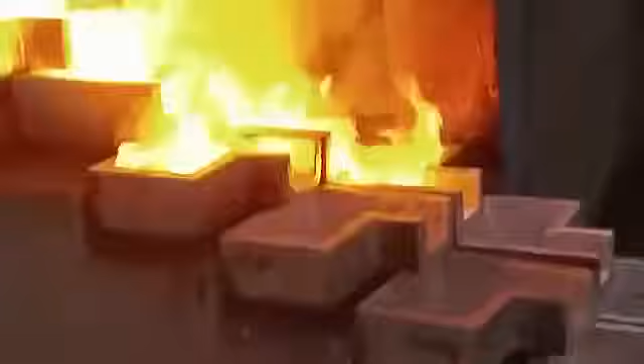5,700 of the world's toughest workers face a job site with temperatures hotter than 150 degrees. My God, burning hot water. Where makeshift supports hold back millions of tons of rock. I'm gonna lose it. All for one of the most valuable metals on the planet. Solid gold. That's not even a joke. That's actually solid gold.

I'm in Johannesburg, South Africa. The locals call this place Egoli, which means city of gold. And quite literally, the soil under where I'm standing is the richest in the world. Located in the northeastern highlands of South Africa, Johannesburg sits above half the world's gold deposit.

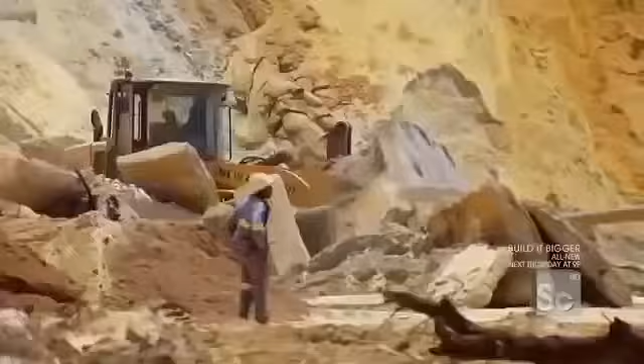When gold was discovered in Johannesburg in the late 1800s, people flocked from all over the world to mine this ore. It was so plentiful that you could actually see the gold on the surface. Over time, mines opened from the east side to the west side of the city, mining deeper and deeper into the earth. Today, there are 70 gold mines in South Africa, employing over 500,000 people.

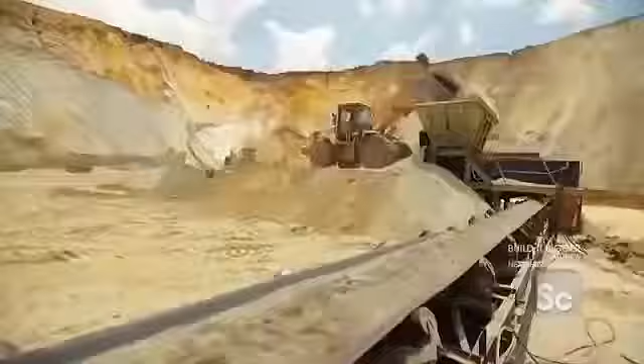The problem is, after over a century of mining, this precious resource is beginning to run out. In the last 10 years, the country's gold production has dropped 45%, while the price of gold has skyrocketed. Now, to re-establish the nation's most important industry, one South African mine is attempting to dig deeper than ever before.

An hour outside of Johannesburg, the Mponeng mine is already the deepest mine on the planet, a subterranean gold factory 2.5 miles down. With more tunnels than the New York City subway and the world's longest elevators. However, most of the original gold deposit has already been mined, and the rest will be gone in just 8 years.

So to keep the mine going, geologists have been drilling and testing in all directions, searching for more gold. They finally found it, a new deposit called a reef, located over 3 miles from the surface, holding over 140 tons of gold, worth over $6 billion.

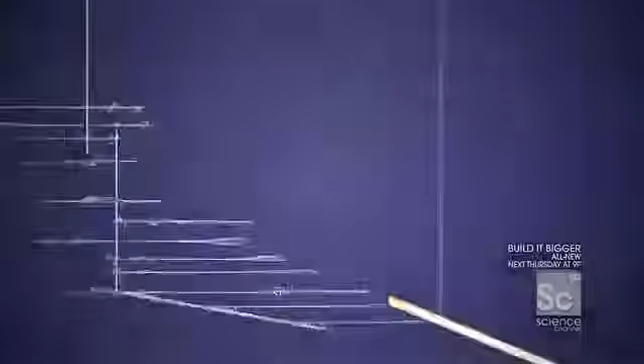So if you didn't go deeper, within about 7 or 8 years, you would have simply mined all the gold that you can get at that depth. That's right. So this new project gives you the potential opportunity to extend the life of the mine by how many years? With the current project, the life of mine will be extended to 2029. 2029? That's correct. So instead of 7 or 8 years, we're talking about 20 years.

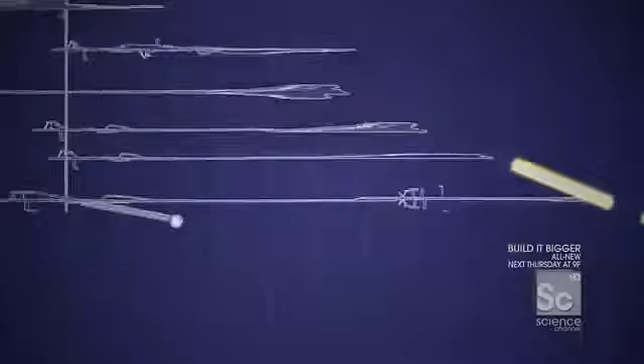That's right, yes. While the team mines out the final gold deposits in the existing mine, they've also added a new deepening team. Their job? Tunnel 7,000 feet deeper to reach the new reef, one blast at a time. The commute to a job a third of the way into the Earth's crust takes an hour and a half.

The trip starts in the longest elevator in the world, a 50-ton beast that carries 120 miners at a time. You know, given where we're going, Gordon, you guys didn't do much to kind of soften the blow and make this thing look nice. This is it. This is mining. This is reality. You ready? Okay. Right, let's go. Bye, donkey, Billy. All right. Here we go.

The elevator travels at 40 miles an hour. It pretty much feels like you're free falling down into the earth. Now 1,000 feet from the surface, 2,000 feet. I'm now deeper than the Grand Canyon. I'm now almost at 8,000 feet. For every 100 feet we drop, the rock gets 1 degree hotter.

Every couple hundred feet, it gets a little bit hotter, a little bit more pressure, and you can feel that inside your head. We're now approaching the bottom. This will be 12,600 feet. Keep in mind, this is the deepest point that any mine has ever worked at in the history of mining. From the bottom of the elevator, it's another 1.5 miles to the face of the tunneling project.

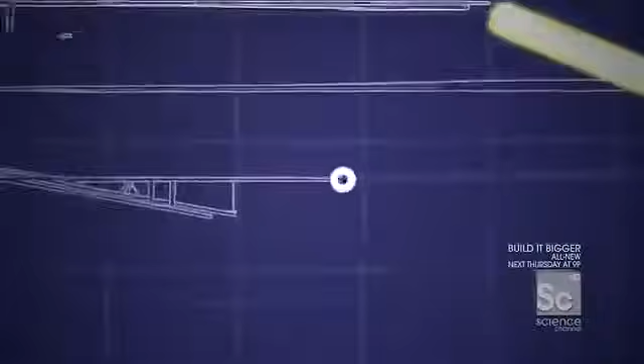The closer you get to the active face of where the rock is, the hotter it gets. So as I step down, every single step, I can feel the temperature getting slightly higher and slightly higher. And right there, that is the very deepest point in this mine. It'll take 600 blasts to reach the new gold reef. They're prepping for blast number 540.

And blasting in the deepest spot on Earth is unlike any other kind of blasting. Faults scattered throughout the rock make earthquakes and rock falls a constant danger. Punishing geothermal heat also makes the working face a scalding 150 degrees Fahrenheit. Oh my God. That's burning hot water. The water that's being heated by this exposed quartzite is literally brought to the point of burning my hand just from the energy from the Earth. Energy from the Earth, and then, of course, the drilling.

Okay, so Gordon, this exposed wall right here, this is the wall that we need to get out of our way. Yes? There's gold back there. Yes? So this wall has to continue to push deeper into the Earth to enable us to go up and straight out to get that gold.

Correct. The rock is riddled with faults, which means the energy from the blast needs to be carefully controlled or risk creating an earthquake. They use a diamond-shaped blasting pattern that concentrates the first pulse of energy into the center, opening up a cavity for a second and third round of smaller charges to safely break up the edges of the face.

Okay, now why do that? Why not just have an even amount everywhere? Well, you want the most energy in the center, because this is the hardest place to break the rock in. As you move outside, you want less damage. If you damage the rock on the outside, you have to put more support in it. You want to keep the ground as stable and as fracture-free as possible on the outside.

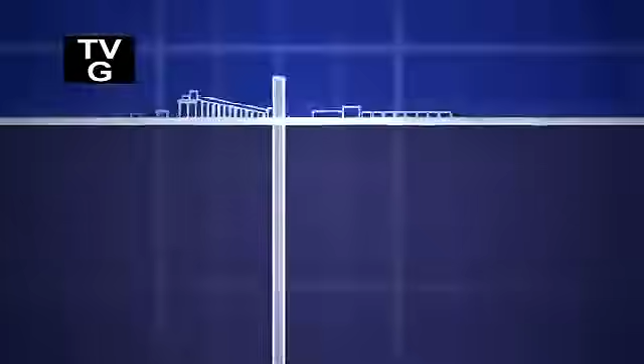In South Africa, the world's deepest mine is blasting 40 feet deeper each day, tunneling towards a reef of new gold worth $6 billion. Almost 3 miles down, each blast risks rockfalls and earthquakes. And with the latest blast detonated just moments ago, it is essential to quickly support the new tunnel face.

Once the blast is complete, the now newly exposed rock is susceptible to the nearly 13,000 feet of pressure pushing down in the tunnel. So to make sure this is safe before any more mining can happen, these guys have to re-support the roof and keep this ceiling up above us. So once you remove the rock, all the pressure from the 12,000 plus feet of Earth is pushing down on our heads right now. Yeah, so the tunnel wants to collapse. That's the natural desire of the Earth right now. That's a natural desire. That's what it tends to do, is to close up.

So essentially, like Atlas, it's your job to sort of push back on this rock and support this open tunnel. Yes, that's basically our job, what we're doing.

You look like Atlas. You're a big man. You can hold back the rock.

The temperature at the face is 150 degrees Fahrenheit, and ammonia fumes from the blast fill the air. Regardless, the team has got to begin work. They do it with a grid of 33 steel rods called split sets. The split sets work like giant screws, pulling the layers of rock together. They're driven 4 feet into the rock face, each holding back 17 tons of rock, 500,000 pounds in all.

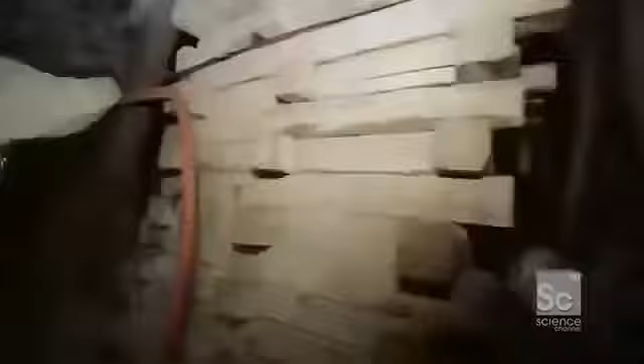The biggest danger when digging 12,000 feet down is triggering a seismic event. There are dozens a day down here, and nowhere to go if one hits. To minimize the disturbance to the rock, the tunnels are kept as small as possible. Now, as I walk up this precarious angle, just keep in mind, look to either side. It's these wood rock packs that are just literally holding this rock up, right? This rock, as you can see, has had its support taken out. They've removed the rock. So the inclination of this geology is to simply come right down on top of us. This support is needed to withstand the massive seismic shifts caused by the blasting.

So, Clive, on a given day like today, how many seismic events happen, for example? We could have hundreds of seismic events, but most of them happen during the blasting time. You mean when the blast just went off like 4 seconds ago? No, that's not the development blast, but the face blasting. Okay, so the blasting is going to happen here this evening. At the face, yeah. So we're on a sequential, centralized blasting method. Everything's cool.

Okay, Clive, my God, that was definitely it. I definitely thought that was it. I definitely was like, well, no, we're fine. Can I just continue? Oh yeah, Clive, just continue with what you're saying. Don't let the neighboring explosion in the rock impede your progress. What's happening inside of you, man?

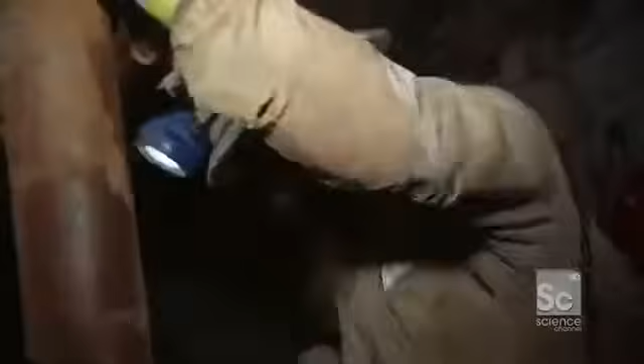So as you can see, what we're doing is essentially wedging this thing in, pushing it down solidly into the ground, and then pushing it tight up to the rock face, and this becomes a strut or a column that holds back this rock. So look at that, just like a jack, you jack up a car to change a tire, same principle. He's jacking it up, it's pressing up against the rock, and now this thing is one solid column, one of many, that's keeping this roof safely above my head.

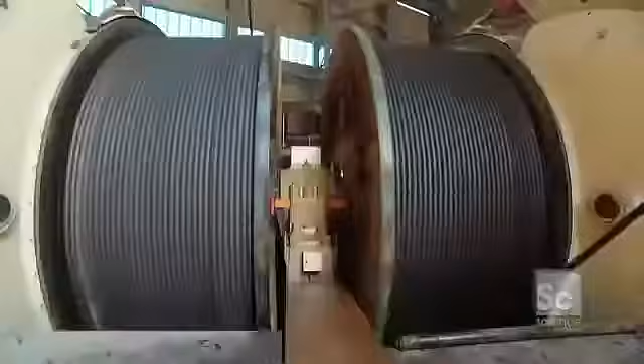Coming up, servicing the world's deepest elevator means slicing one of the longest and heaviest steel cables ever built. This is like an extraordinarily bad idea.

For the miners that commute 2.5 miles underground, 3 shifts a day, there's simply one way in and one way out. The elevator shaft. The elevators are the very lifeblood of this job site. They are what enable them to get 3,500 workers underground and at the same time pull above ground literally hundreds of thousands of pounds of rock. So given the extraordinary requirements on this site, these are no ordinary elevators.

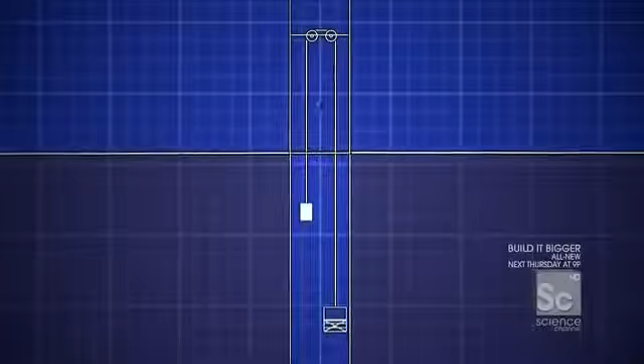A typical elevator uses a weight to counterbalance the load. However, a weight for an elevator this heavy would be more than 60 tons. Instead, the mine offsets the cab with a second elevator. So when one elevator goes down, its weight pulls the other one up.

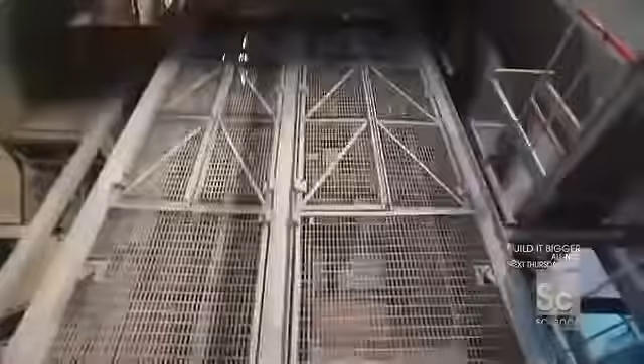Instead of having to actually pull the elevator up and actually lift its own load, you counterbalance its weight with another hoist. Yeah, with the skip that is actually descending. That's a counterbalancing effect that we have in order to improve the efficiency of your winding cycle.

With 300 lifts a day, the mine's elevators travel the distance to the moon every 9 months. You have the weight of the rock, you have the weight of the hoist, you have the weight of the cable, and all of this is happening constantly on both sides, basically 24 hours a day. Yes, 24 hours a day, sometimes 7 days a week. Including the 20 tons of its own weight, the total load on this rope can be more than 70 tons.

Last year, a rope at a nearby mine snapped, dropping a cab, killing 8 miners. So to prevent a similar failure, the team is performing a stress test on the elevator rope. What are we doing today? We're going to cut the front end of the rope and then send it away to the laboratory to be tested in order to ensure that the integrity of the rope is still all right.

I mean, it's hard to overstate, but this is for the safety of people who are in the elevators, for the ability for you guys to mine. I mean, this is the lifeline of the project right here, right? That is right. It's a risky cut.

Over time, thousands of trips up and down have twisted the rope, tightening it and building up enormous amounts of torsional energy. If I have a plastic shopping bag and I sort of spin that shopping bag, it'll spin and spin and spin, and all of that torsional energy is bound up in that rope right there. And if I let go, it'll unspin very quickly. Yes. And today, as we cut this rope, all of that torsional energy is built up inside the rope. Yes. So we have to make sure to take out the spin before we cut the rope.

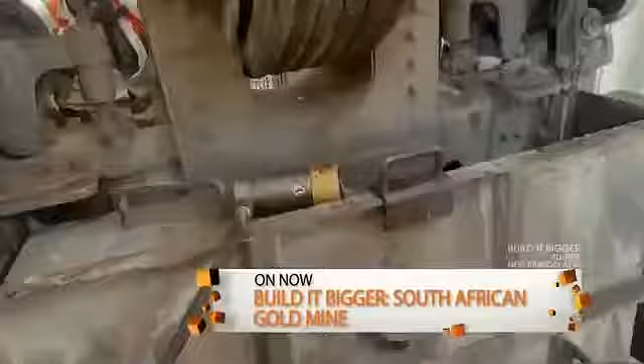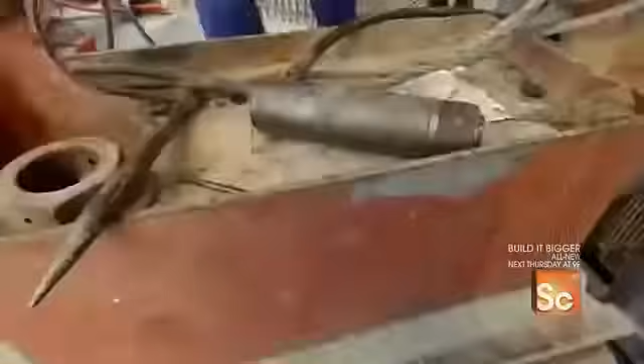Yes, that's correct. With the elevators offline, no rock will be hoisted to the surface. The team has only 2 hours to get the rope section cut and the elevator back in service. The first step is to secure the elevator with a cross-beam support. So it's this piece of steel right here that locks the conveyance into place so it doesn't fall when the cable comes out. Then, while standing on top of the elevator, they unhook the rope.

And Chris, I have to put a harness on because what happens if I fall down there? How far is that? Well, we will find you 8,400 feet below. 8,400 feet down. In many pieces. In many pieces. Thanks, Chris, a man of details.

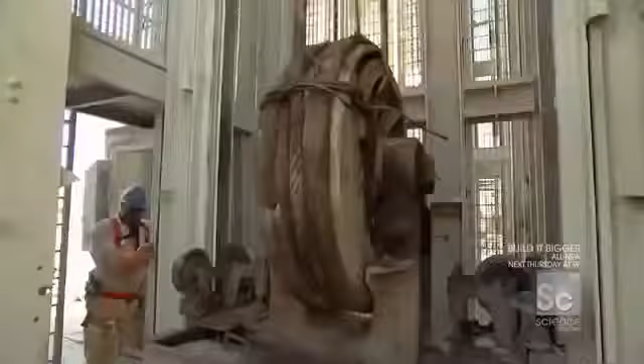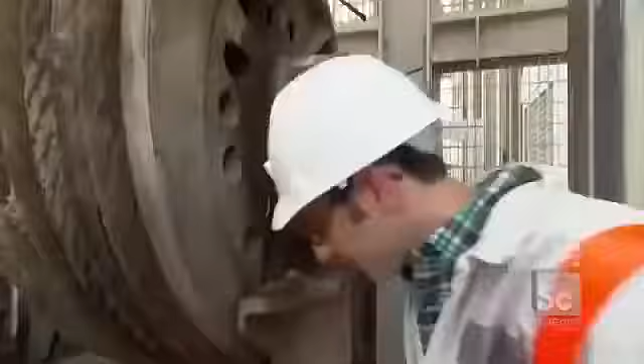The rope is held in place by a single 100-pound steel pin. It's so tightly wedged in, they have to use a hydraulic jack to get it out. That pin right there is the very last piece of steel that's holding this entire compensator to the elevator. So basically, we're going to use the jack to just smack this pin out and disconnect the hoist from all the cable. All right, Marnie, let's do it.

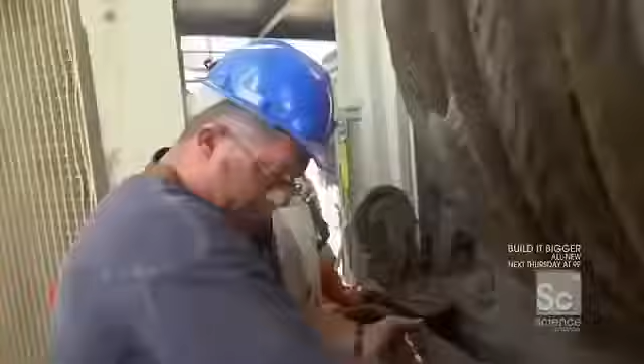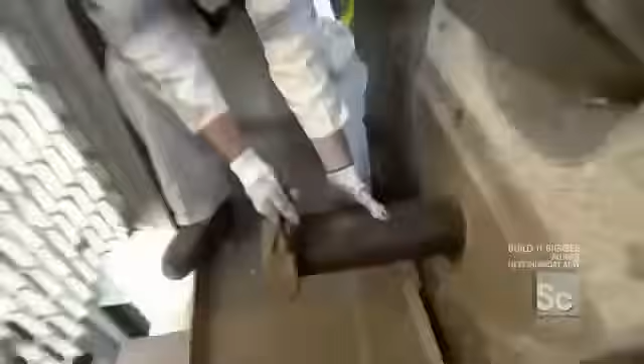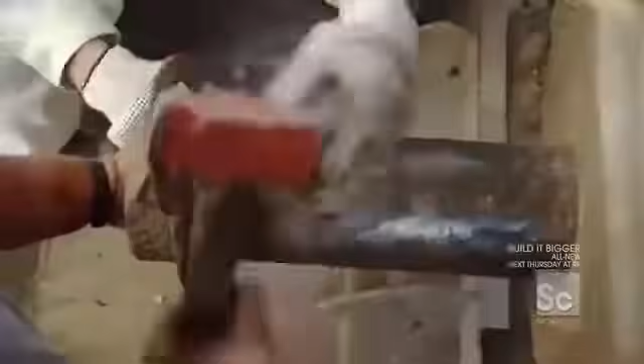To be sure the pin doesn't damage the top of the cab, it's coaxed the final 4 inches by hand. So, Marnie, the pin is like 99% of the way out, right? Yes. Okay, so slowly ease the pin out. Yeah, we just pull the pin out. All right. You ready? You want to smack? I'll smack. You hold. Is it coming? It's coming.

Ready? Okay, hold on. Okay. You got? You okay? Got it, put him down there. Okay. I feel like we just kind of delivered a baby here.

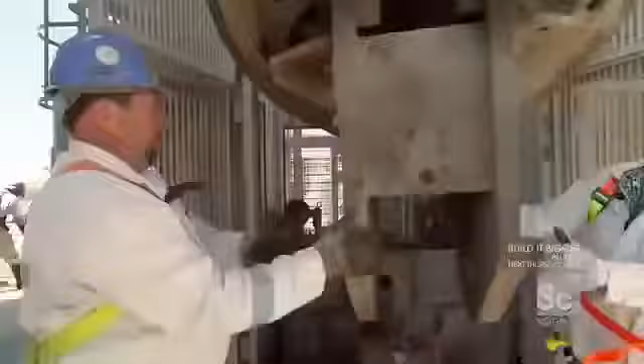All right, so let's do it. The pin is now out. Let's separate the compensator from the hoist and get these cables over there so we can cut them. To keep the tightly wound rope from violently spinning out, first they have to clamp it down. You open this up, and then we're going to take the rope, lower it into this hole, so that when we finally cut the rope, all that torsional energy, all of that spin force will get released and controlled with this thing right here.

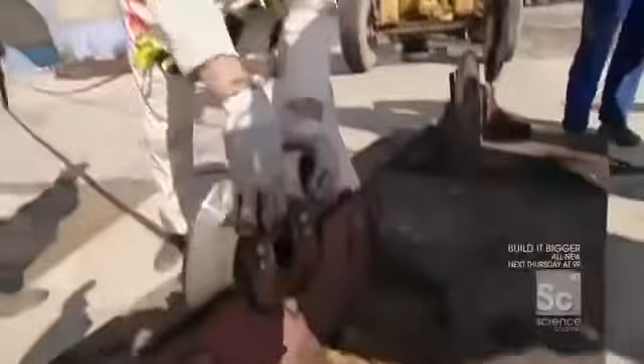The rope is locked in with 4 bolts. This is essentially like a brake pad, like a caliper on the brake. When it's cut, it wants to spin like crazy, but you can apply pressure and slow that spin down.

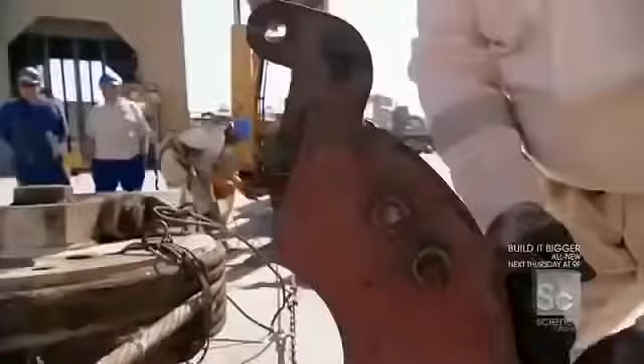With the cable locked into place, the team can now remove a 25-foot section for testing. Because it's strong enough to lift 3 fully loaded semi-trailers, the only way to slice through it is with an acetylene torch. You're actually cutting it with a torch, melting it, and you have molten steel slag. There's so much embedded torsional force that when you finally cut the cord, it can actually spin out and spray you with that stuff.

There you go, thank you sir. Great, you can open it there. Do I need your glasses? I think that would be better, I think they better too. And also, let's be honest, I'm gonna look like a badass. I'll trade you those, I have an astigmatism.

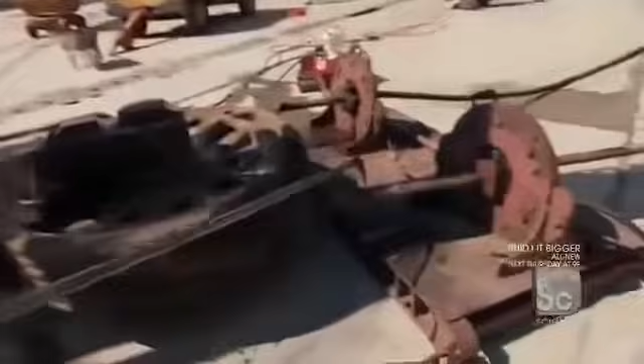Now it's fixed. Hey Nick, I'm gonna hit it right here, right buddy? You like that? You happy with that? Can you see with those glasses on? It's clear? Yes, you look pretty now. I look pretty? You look handsome and clever. I don't know why, Nick, you look so much smarter all of a sudden.

All right, I'm gonna crack open the acetylene first. Open, gets a little bit of acetylene going. And fire.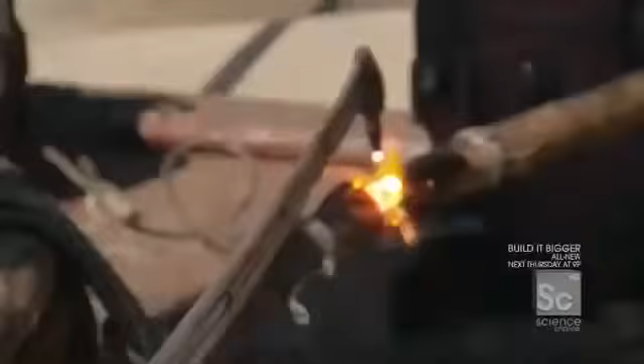This is like an extraordinarily bad idea. The torch burns at 3,000 degrees, which is 1/3 the temperature of the sun's surface.

There it is, she's opening up. It's gonna kill me, it's gonna kill everyone. Extreme heat is needed to melt through the dozens of interwoven steel wires inside the rope.

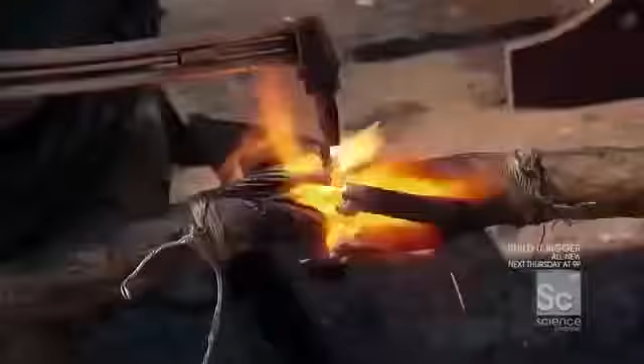Oh, there it is, there it is. Oh! Oh!

All right, so I get back my glasses. Nick, the Boilermaker, gets back his torch.

And we're set. Now that it's separated, we're going to release the tension and let all of that force out of the cable. Marnie, you ready?

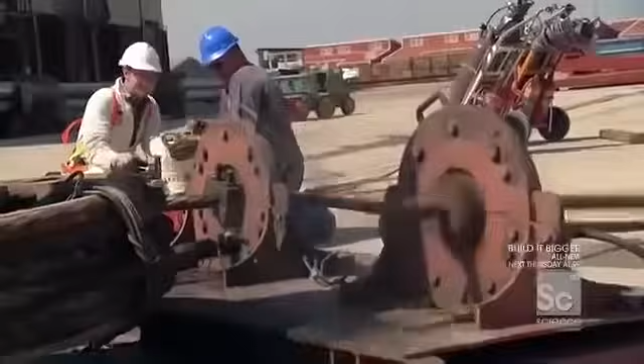Release it out, start spinning, immediately pull it back, lock it up. Here we go, everyone stand back. Let's release the tension. Dear God. Ready? That's it, again. It's finished now. Well done. Stressful, man.

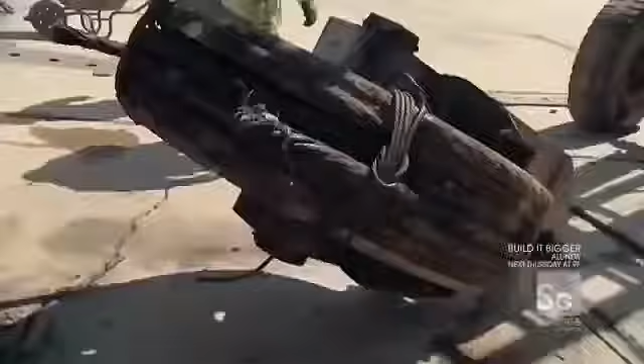Okay, with the piece now cut off, this can go to testing. And now, as you can see over here, we have to re-spool this up, connect both wires, and ultimately within about 1 hour's time, get this cable back in the shaft and the mine working again.

Coming up, I strike gold. This is it, this is it. This is the gold, in some of the oldest rock on Earth.

But first, what skyscraper has the world's longest elevator? The answer after the break.

Your trivia answer: Dubai's Burj Khalifa has the longest elevator at 2,000 feet, just a quarter of the size of Mponeng's elevator.

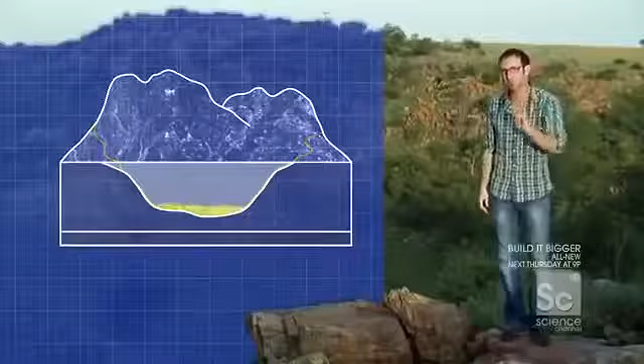South Africa has more gold deposits than anywhere on the planet. But the question is, how did the gold get here? Well, if you go back billions of years ago, this entire region was one enormous lake. Gold deposits were put into this lake from surrounding waters. Then, about 200 million years ago, a series of volcanic events buried this lake, thereby entombing the gold. And that reserve right there is the very stuff we're after today.

Geologists know that the gold is 2.5 miles down. The hard part is getting it out. After 2 miles of tunnels, it's a 100-yard climb up a 22-degree angle to find the mining face of the gold reef.

Okay, this is it, this is it. This is the gold, this is the gold. This is the ore body we're going to mine. This tiny, small 3-foot swath is why I'm now at almost 13,000 feet under the ground. 100% right, and sort of packed inside of here in tiny amounts throughout.

It's gold. The gold is in dark carbon particles scattered throughout the rock, making the reef grayish, not yellow in color. What's so incredible is the gold is so tiny that I can't see it right here. Yeah, so little, specks of it, like particles of sand inside of this.

The fastest and safest way to loosen this ore is to drill and blast. Are we ready to rock and roll? Yeah, ready to drill. Where's the drilling? Right down here. So now that we found the gold, now it is time to get it.

Miners drill blast holes into the ore and fill them with a powerful emulsion dynamite. So we're going to put a hole about 4 feet deep into this rock using this enormous drill. Basically, this is just a very, very large chisel that's rapidly making contact with the rock. That's a big chisel. Michael, Jacques, it is time for us to put a hole into this gold, get some explosives, and get what we came for. Here we go.

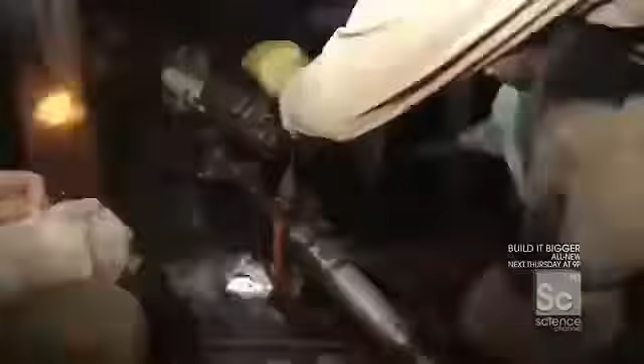The gold reef naturally dips at a 22-degree angle, which forces the miners to perform precision drilling at a steep decline. The goal is hold it tight, keep it level, and push the drill in. Okay.

Push that way. Are you ready? Forward. Yeah, here we go. Push it. Push it.

The drill runs on compressed air, hammering through the rock at 6 inches and 3,000 blows a minute.

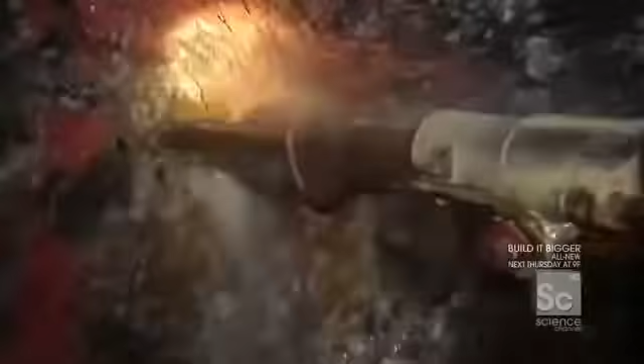My hand is still vibrating. You're good, you're good, you can be a driller. No, I can't do it.

The reef wall is now ready for blasting later tonight. The confined space and constant earthquakes mean blasting can only happen between shifts. 5 tons of charges are detonated from the surface.

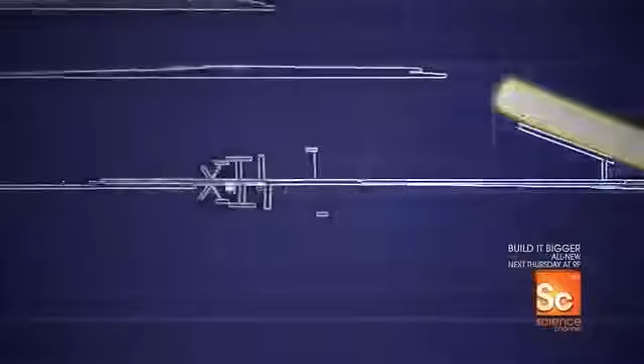After blasting, the rock has a 5-mile trip down into a storage silo, back to the shaft, and then up to the surface. After the blast takes place, all of this newly loosened ore will come sliding down this slope. It'll arrive here in the gully. It's then when this device called the scraper will essentially scoop up this loose material and drag it all the way down to something called an ore pass.

The scraper drops the gold hundreds of feet into the ore pass storage silo.

And just to be very clear and straightforward about how deep this hole is, if I may. Yeah. It's like the colon of the earth.

For the miners, this is what it's all about. They drilled, they blasted, they brought the ore to the surface to be transformed into gold bars.

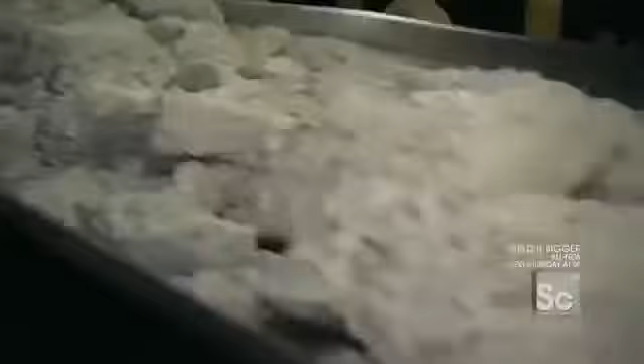20 miles of trains and conveyor belts move the gold reef rock to the main shaft. It's there where the gold rock meets up with the waste rock from the deepening project. Both travel side by side up to the main shaft together. The contents of that conveyor belt are worth millions of dollars. The contents of that conveyor belt are totally worthless. And every single hour, this mine accumulates over 450 tons of both gold reef and waste rock.

The challenge is to get them out of the mine and up to the surface. The reef and waste rock travel down a conveyor belt as long as a football field to two 50-ton elevators. The job of sorting the waste and the gold belongs to the conveyor operator.

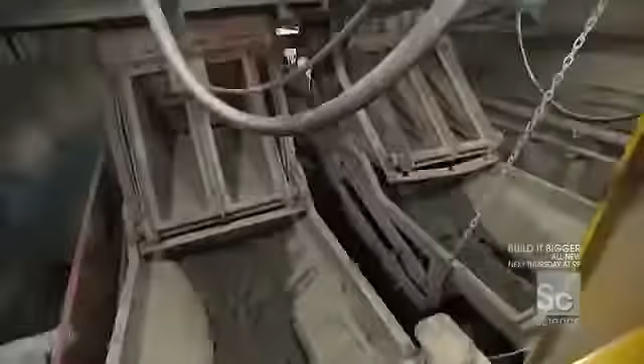Lisa, hi, I'm Danny. I'm fine, and you? Nice to meet you. So Lisa, this basically works like a dump truck, like the back of a garbage truck. Kind of open the payload, fill up the belt, close it up.

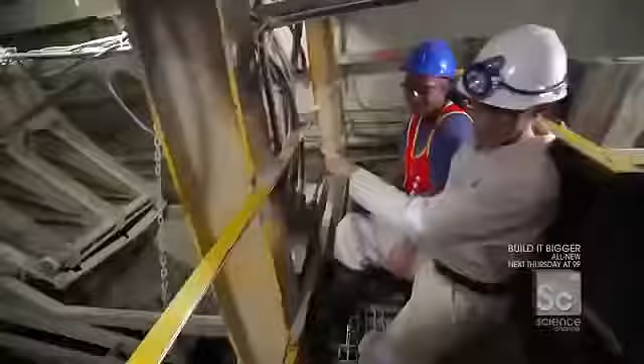12,000 tons of rock pass through Nolizwa station every day. This me. You got it. Okay, you do the gold, I'll do the waste.

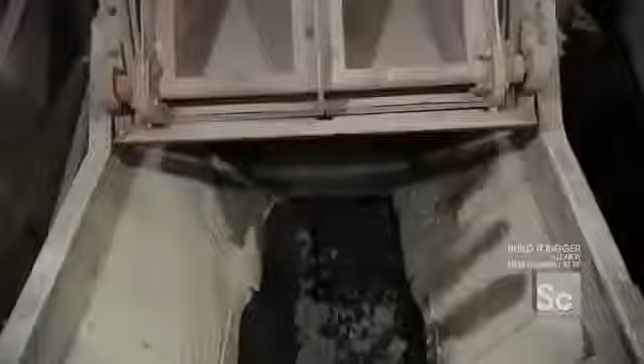Sort of appropriate, really. Here comes a big dumper. Big dumper. Not a lot of variation in the task. It's open, and closed, and closed. Open and closed. Sometimes we open, other times we close. Yes.

She's got it under control. She is sending this stuff to a hoist, which is then going up to the surface over 2.5 miles.

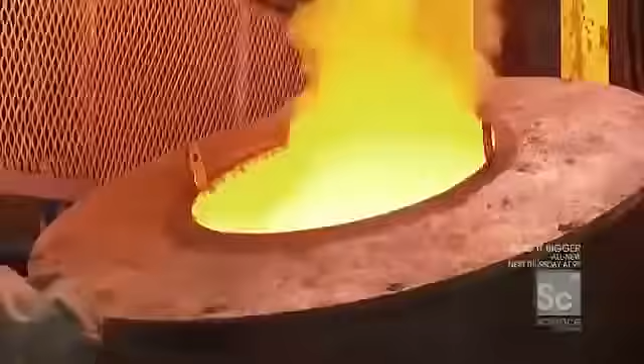Coming up, I enter one of the most highly secured buildings in the world to forge $4 million of pure gold. Solid gold. That's not even a joke. That's actually solid gold.

Last year, South Africa's deepest mine produced 13 tons of gold and 2 million tons of ore. Every ounce of gold they mine produces 3 dump trucks of waste. Here at the Mponeng mine, in just a 24-hour window, they pull out of the earth just 100 pounds of solid gold. Now, to get that 100 pounds of gold, in that same 24-hour window, they have to excavate nearly 15,000 pounds of rock. So to put this in perspective, in a given 30-day period of time, we're talking about nearly 500,000 pounds of solid rock, building a veritable man-made mountain right next to the mine.

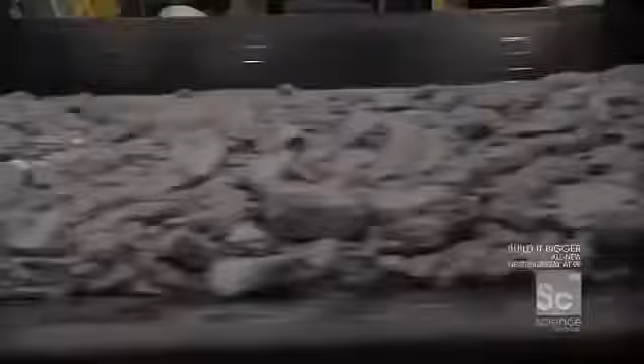Going from rock to gold takes 48 hours of processing. That happens at the mine's 20-acre on-site processing plant.

So the ore that comes out of the ground is not a shiny gold nugget that I imagine a panhandler from the 1880s biting on. No, this is not it. It's not visible with a human eye. So we're talking about infinitesimally small bits of gold powder. Yes, invisible to the naked eye, kind of scattered throughout this rock. And your job is to somehow get that microscopic powder out of the rock and then recombine it into solid gold. That's exactly what we do.

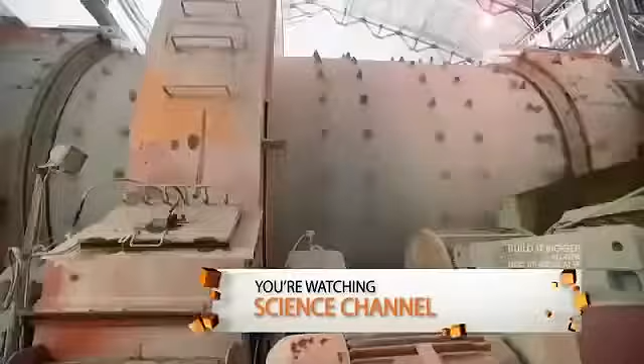First, a 4,000-ton mill crushes the ore into a sand-like dust. The team then mixes in cyanide and carbon to dissolve the quartzite and leach out the gold. The purified gold then goes to the smelting house for the final step of the process: melting and pouring.

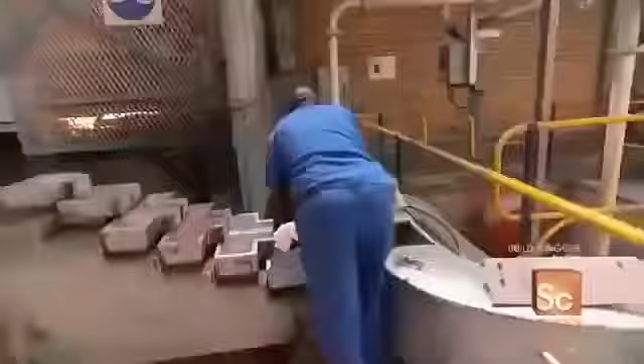Today, they're pouring 10 55-pound gold bars worth $4 million, the product of half a week of mining. So right now, in a matter of minutes, we're going to pour out about 10 solid gold bars. All of the mining, the digging, the blasting, the drilling leads to right there. That's the final product.

It is incredibly hot now that the gate is open, my face is actually burning. $4 million of liquid gold coming out of the smelter right now. Here it comes, here it comes. Wow, look at that. Each mold contains enough gold to buy 3 Lamborghinis. This looks like a science fiction movie. That is incredible, millions of dollars, Isaac.

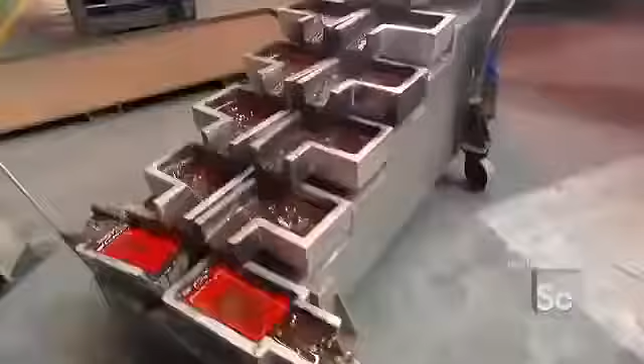It takes only 5 minutes for the molten gold to solidify. You know when you finish baking a beautiful lasagna and you're about to take it out of the oven, but you're a little nervous you might spill it? Well, this is kind of like that, but a significantly more expensive version.

Once we've got the gold into the mold, gotta get the gold out. Flip the gold. Up. And over. Smack it out. And now, come on, there it is. Solid gold. That's actually solid gold. That's not even a joke. That's actually solid gold.

So, Isaac, that scrap right there, we're gonna throw that away. We don't need that, right? I'll take that to the garbage for you, I'll dispose of it. That is unfortunately not how we operate here. So even that slag right there, you're still gonna remelt that and keep looking for more gold. So I can or cannot take that home with me? You cannot. No one is allowed to. Even the garbage has gold in it around here.

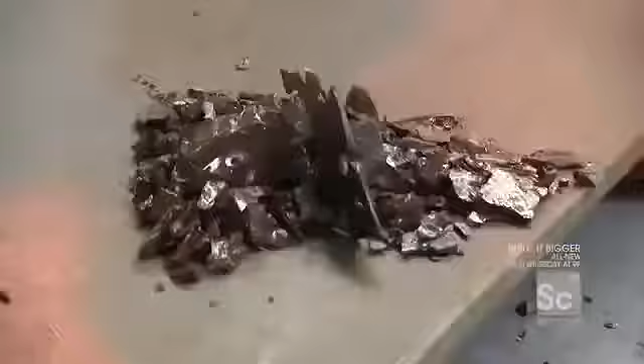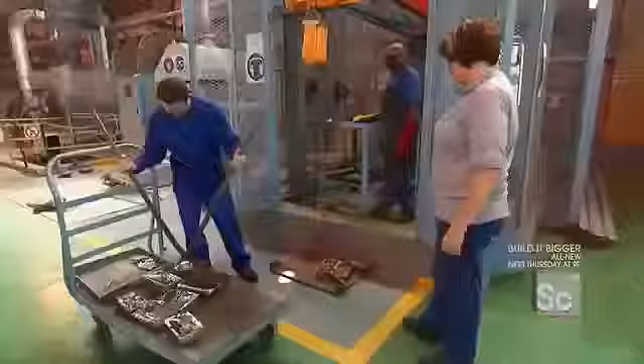The bars are encrusted with impurities, like zinc and silver. The gold is then transferred to a locked cage to clean off this waste known as slag. They're like golden brownies, this is like the burnt one that tastes good at the bottom of the batch. Okay, so now that all 10 gold bars are stacked, we're gonna dump them into this hopper and begin the cleaning process.

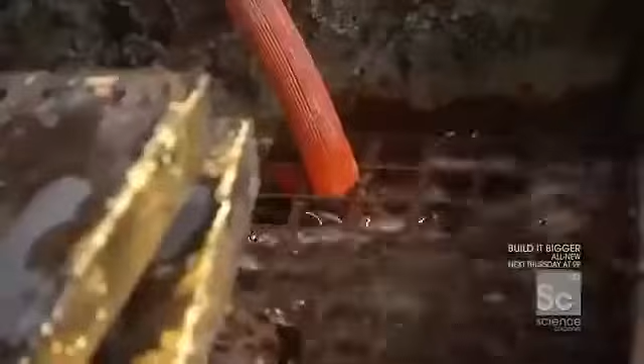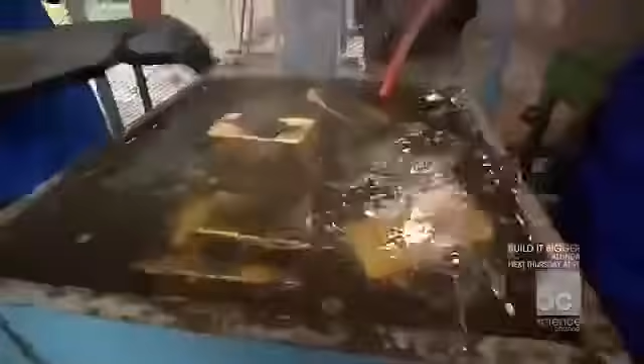Even though the gold has hardened and cooled from its molten state, it's still 500 degrees Fahrenheit. This gives you a sense of just how hot the gold is. We're putting in some lukewarm water. The gold is piping hot, kicking off steam, but now you can see the slag starting to come off and the shiny gold begin to reveal itself.

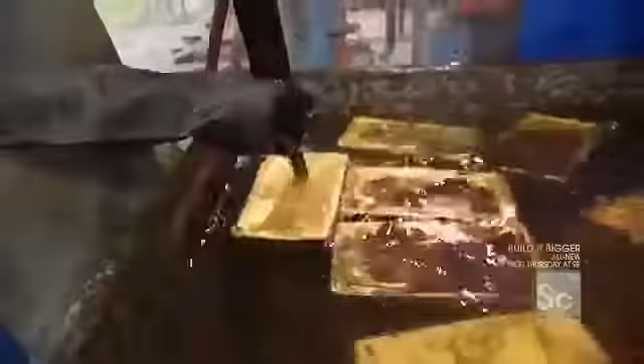Okay, now the water is drained, the gold bars have been cooled off a bit. Now we're gonna start pulling the slag off with this, the metal scaler. Now removing these impurities is crucial. The bars have got to be 99% pure before they leave the plant.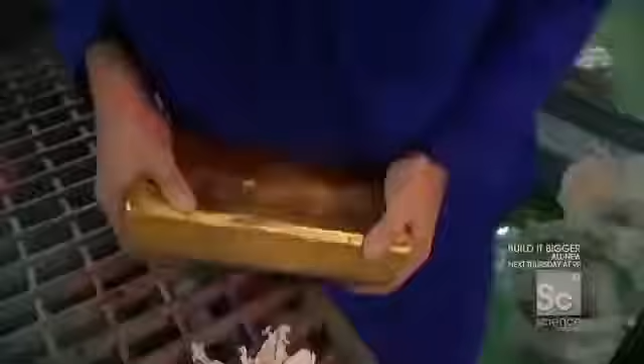Governor, what do you think? It's nice, huh? Yeah, it's nice. You see here, it looks so beautiful. Beautiful, clean, no slag. No slag, ready to go. There it is, the finished product. Nice, shiny, solid gold. This 500 pounds of gold will be stored in a vault until picked up tomorrow by a high-security helicopter.

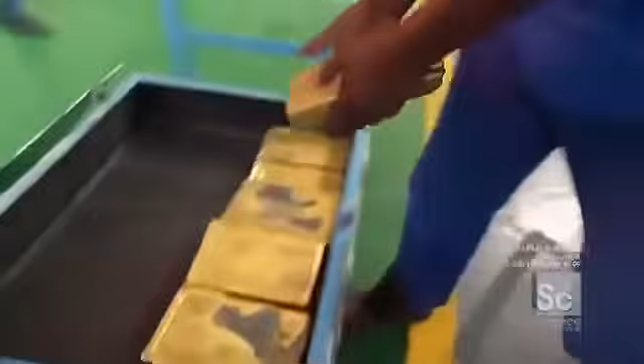Coming through. $4 million of gold. Okay, well there we have it. All 10 bars of gold, all $4 million have been delivered into the secure vault. But keep in mind, that relatively small amount of solid gold took over 4 days of solid mining, and all of that taking place over 12,000 feet under the Earth's surface.

2.5 miles below, at the deepest spot inhabited on Earth, the deepening team has nearly reached the end of their groundbreaking project. From your perspective, every single day you are not just going to work, you're literally breaking the world record every single day you push. It's got to be kind of incredible, they have to give Guinness a call, every day. The crew has 700 feet to go before they reach a $6 billion lode that'll keep South Africa's most important mine producing gold for decades to come.

The value of gold is a somewhat abstract concept. In principle, we know it's very expensive, whether it's a ring or a watch or a necklace. But until you see this project and physically experience just how difficult it is to extract this ore from the earth, can you appreciate just how precious a metal this is? And while this is an amazing feat of engineering, and this is the deepest mine in the world, the success of this project is not about breaking records. It's about the future of South Africa's most important industry and the country itself.